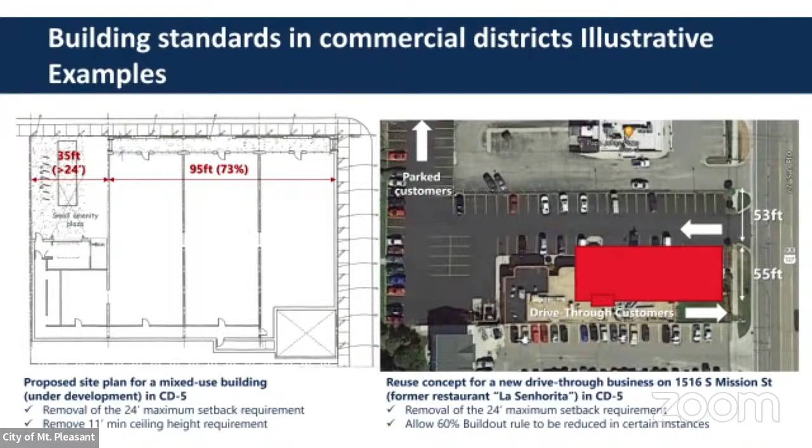On the right, you have a drive-through establishment that wanted to come into this site on Mission Street, and they did not want to rebuild the whole parking lot. This amendment would also allow reuse and retrofit of existing sites without adding too much cost onto development.

These two illustrations here on your left show a commercial building with a 24-foot height at frontage, but the actual roof pitch reaches that 24 feet and is hidden behind the wall around the building perimeter. That's the kind of accommodation that we'll be allowing moving forward.

And then with the removal of the 24-foot side setback, we would also be allowing things like outdoor recreation areas or open seating, like you see here in this illustration.

Parking would still only be allowed in the third lot layer, which is represented here in this illustration on the left. The illustration on the right shows a building that has the 24-foot maximum or minimum height at frontage, but then it goes down in the back, so that would be able to be accomplished.

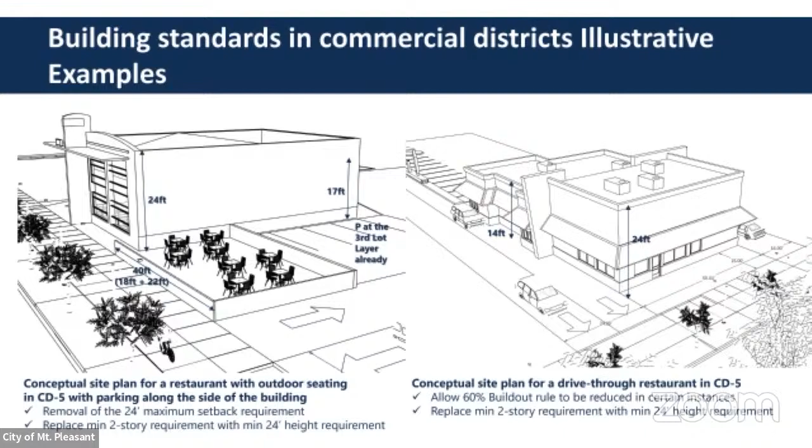And we also would allow a certain 60% build-out rule to be reduced. In this case, I'm showing a narrow site that needed that accommodation due to the drive-through configuration needing 2 exit lanes.

This is the last illustration showing a mixed-use development achieving its maximum height allowance in CD5 districts. This is an illustration on Mission Street. We would be allowing that 15-foot setback at the corner to provide enough clearance for vehicles to approach Mission. And then the principal frontage clarification would allow a 41% build-out scenario on the side street to accommodate for parking in the back, which is our overall goal with parking in these commercial areas.

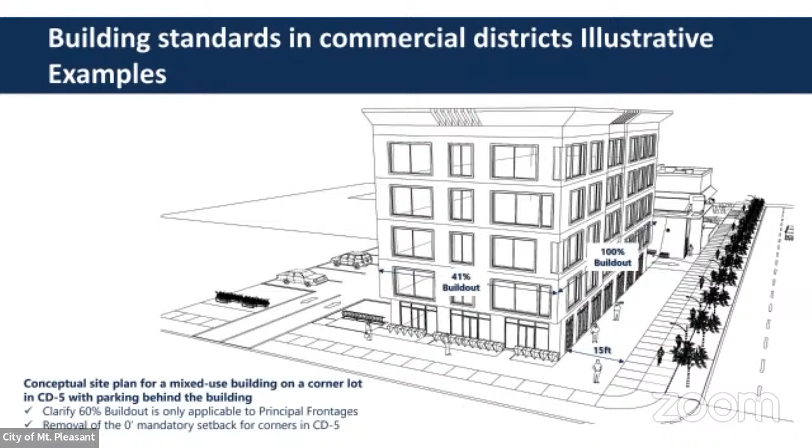So the requested action is for the Planning Commission to recommend that the City Commission adopts text change 24-01. That concludes my presentation. Thank you so much.

Thank you, Ms. Barber-Dykiel. Do any members of the Planning Commission have any questions?

A couple quick ones. Isn't the 11-foot requirement actually 14 feet? No, I double checked that, and remember we had that confusion last time. The current requirement is 11 feet. The 14-foot is the maximum ceiling requirement for first stories. Okay, I guess I don't know what happened with that one property, but they were insisting that the city was insisting on 14-foot ceilings. That may be a miscommunication. The requirement was 11 feet, and I do have a letter from the design team saying that they were accommodating the 11-foot ceiling from the frontage. Okay.

Any further questions? I'll open this up to public comment. Seeing nobody looking to speak, I'll close the public comment and open for discussion. Nothing online. Apparent lack of interest. Okay.

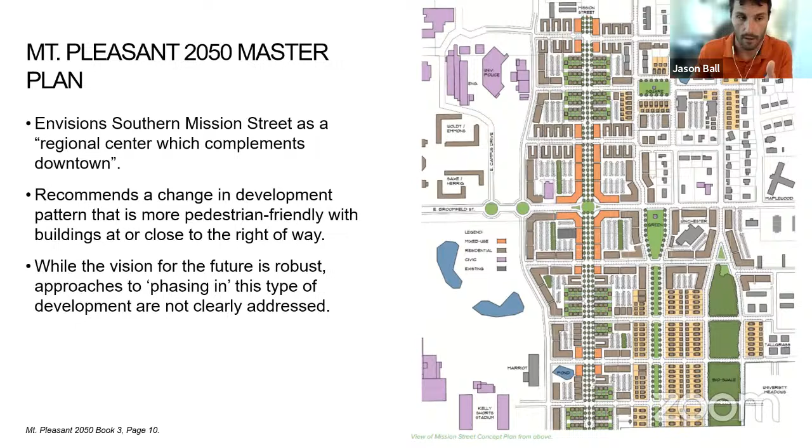We looked through a variety of other plans, including the city's complete streets policy, as well as previous access management plans. Any result from this work will be consistent with the city's adopted complete street policy.

This slide is taken from the city's 2008 corridor access management plan. One thing we wanted to show is that while we're doing new work, most of the concepts we'll be talking about are not new.

This shows the corner of Bluegrass or West Campus Drive and Mission Street - there's a gas station, Target, and the hotel there. Any of you who were on our walking audit, we walked this portion of the corridor.

This plan notes needs for cross access, closing driveways, and limiting access to the street to improve safety and reduce potential conflicts between pedestrians and vehicles making turns. These are all still really good ideas that need to happen - we're not throwing away this previous work, just building upon it and exploring how it works in today's context.

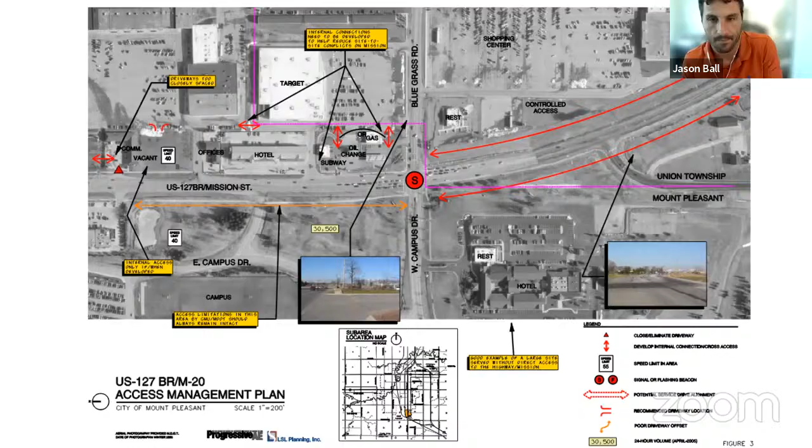The next piece of work we did was looking at demographic changes, particularly the impact of population change as it relates to decreases in enrollment at CMU.

While Mount Pleasant lost about 4,200 people over roughly that same period, CMU saw a decline of about 8,800 students at its main campus. Assuming many of those students are living in Mount Pleasant, we'd expect a similar decline in city population, but we haven't seen that same drop - 4,200 is a lot less than 8,800.

Looking at population change across age brackets in 5-year increments, between 2011 and 2022 there was a decline of about 4,000 people in the college age bracket - late teens, early 20s. But during that same period, there was an increase of about 1,000 people in the family formation age, 30 to 45, then a decline in people in their 50s and an uptick in people in retirement age, 65 to 75.

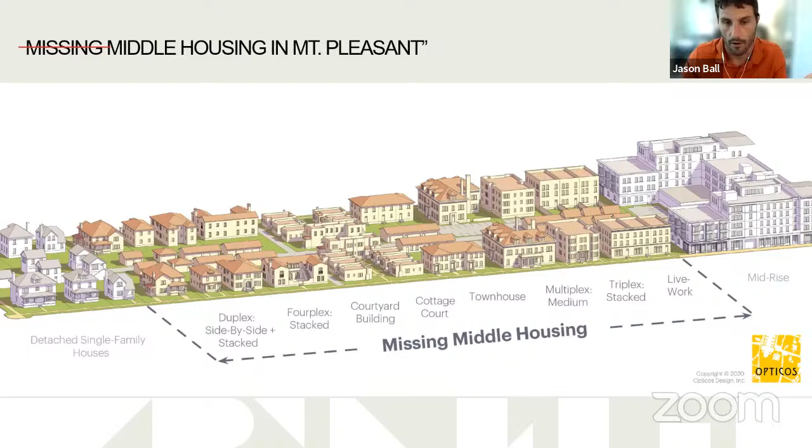Lastly, when we look at housing, you may be fairly familiar with this graphic — I believe it's in your master plan. We've had this concept for a long time in Michigan that we've been building a lot of the housing types on the far left and right-hand side of this graphic: lots of detached single-family homes, lots of large apartment buildings, but not much in between.

That's certainly true for Michigan, but it's not actually true for Mount Pleasant. This chart shows the distribution of housing types, not households, but physical housing types by the number of units in a structure. In the state of Michigan as a whole, a little over 70% of all housing units are single-family detached — one house, yard, driveway, et cetera. In Mount Pleasant, that number is 40%.

In that sort of missing middle category — structures with between 3 and 19 housing units — Mount Pleasant has a really nice share of housing units within those kinds of structures. This may present an opportunity for the city to think about, as you're seeing changes in student enrollment and changes in preference for your population, opportunities to repurpose some of those housing units to be less focused towards students and more focused towards the populations you're seeing come to the city — families as well as retirees.

Home values have generally stayed relatively steady compared to the city of Midland, the next closest large city to Mount Pleasant. The home value index dropped off a little bit over the last couple of years, but generally it's holding pretty consistent with Midland, which has a very healthy housing market, as healthy as any housing market is right now.

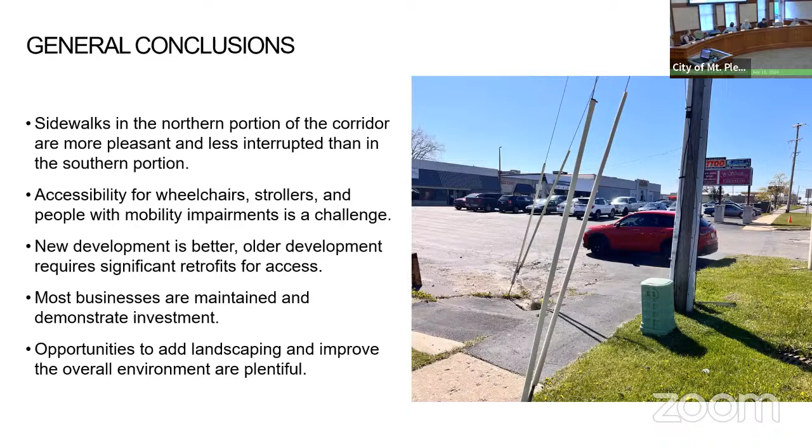The picture here is in our southern part of the corridor. You can see the sidewalk just kind of ends in a parking lot with a car parked in front of it. Accessibility is a challenge for anybody that's not walking, or even folks that are walking, whether you're in a wheelchair or a stroller. Anybody with mobility challenges finds it difficult.

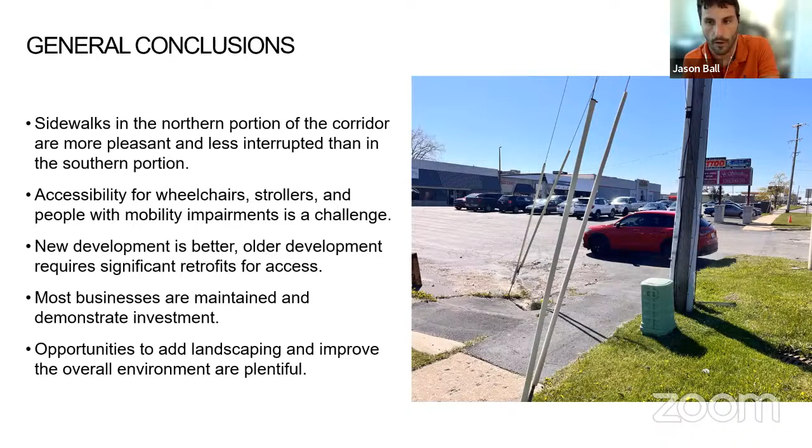Generally, new developments that have come in over the last 5 to 10 years do a much better job of providing pedestrian access to the street and limiting driveway access than older legacy developments, where that wasn't a priority. That being said, most businesses are well maintained and demonstrate investment, with relatively low vacancy rates still. There are lots of opportunities to add landscaping and pursue basic aesthetic improvements in relatively low cost, tactical ways that we'll be exploring.

This illustrates our existing right-of-way. This varies, so this is a generalized version, but we actually have 4 different right-of-way widths throughout the corridor. Generally, from Bluegrass to Preston we're 100 feet plus, and between Preston and Pickard we're between 80 feet and 70 feet in terms of available right-of-way.

From Bluegrass to Preston, when you get outside of the sidewalk, generally we don't have buildings close to the street. Everything's set way back, with parking lots or landscaping and grass between the sidewalk and destinations. Whereas in the northern portion of the corridor, north of Preston, we've got buildings much closer to the street—maybe not at the sidewalk, but within relatively easy walking distance.

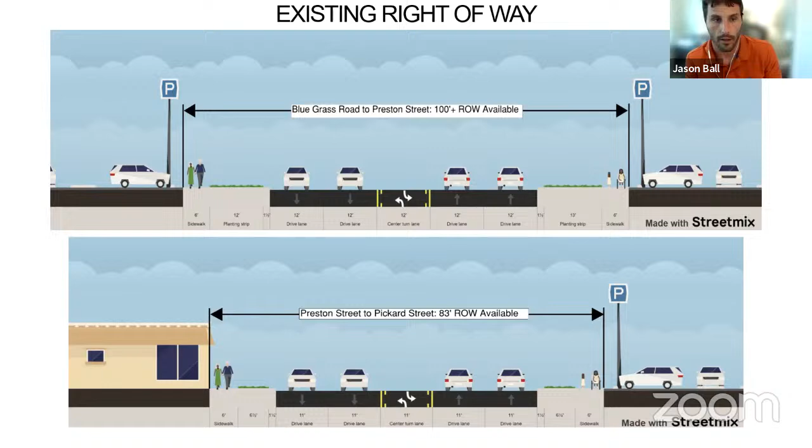Volumes also vary along the corridor, with higher volumes south of High Street and lower volumes as you go further north.

This slide shows the locations of traffic accidents or crashes along the corridor. As you can see, crash frequency is highest at the southern end of the corridor, concentrated at the intersection at Broomfield. Generally, severe crashes were located at that intersection, including a fatal crash with a pedestrian earlier this year, and also closer to Broadway. Overall, in the 5-year period we studied, from 2018 to 2022, there were over 1,000 crashes in our 3-mile corridor.

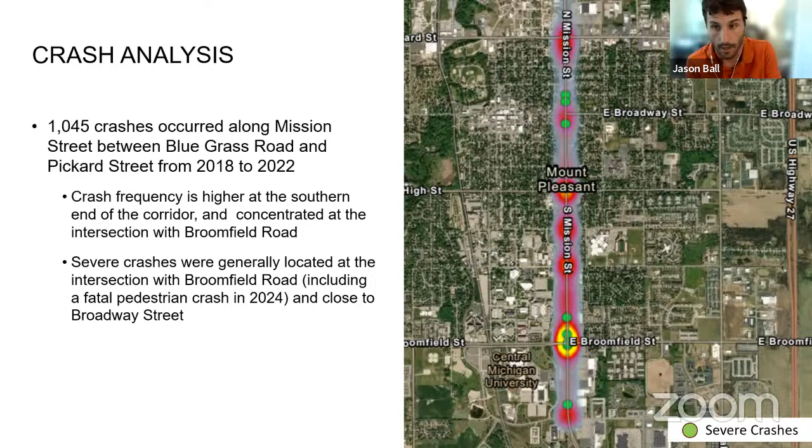As we think about designing the corridor, it's important that we pay extra attention to crashes or impacts on what we call vulnerable road users—essentially anyone who doesn't have the protection of a car around them. While pedestrians and bicyclists were involved in just 2% of crashes, they were part of 33% of the crashes that resulted in a severe injury. This is common sense: if you're in a crash with a car while on a bike or walking, the chances you get hurt go way up compared to being in a car with airbags and modern safety improvements.

So as we think about designing the corridor and addressing that safety issue, we're really going to be thinking about not just how we provide for vehicles, but also how we ensure we're protecting those vulnerable road users to make the corridor safer and reduce those serious injury crashes.

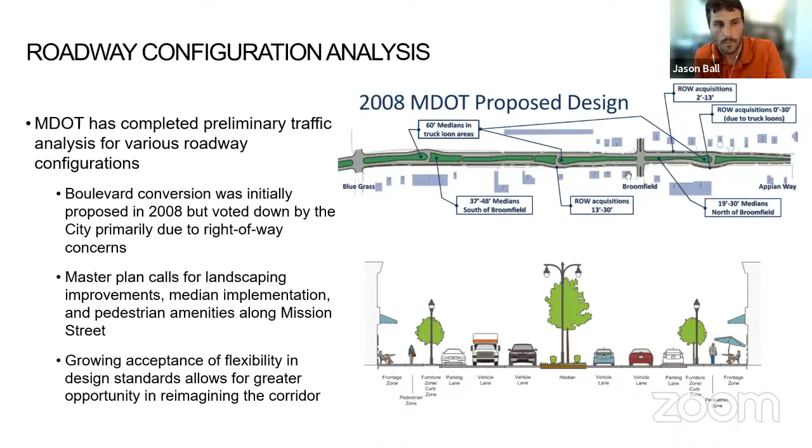MDOT earlier this year performed some modeling to understand the change in vehicle operations based on different roadway configurations. They looked at impacts of adding a median like the one shown in the picture above, based on a scenario with gradual increases in traffic volumes over time. You can see that by adding the median or boulevard concept, overall vehicle delay in the corridor is much less than with the current condition, and congestion goes down—so efficiency is better. You're able to travel from one end of the corridor to the other in less time than if we maintained the current condition.

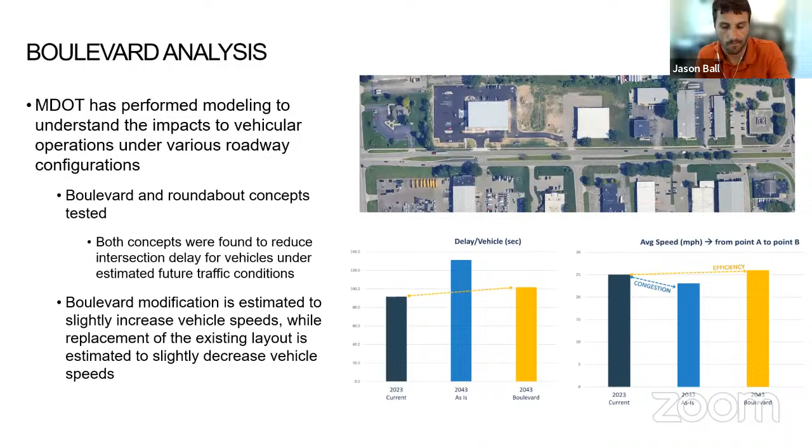Lastly, our summary of survey results. We had a spectacular response with almost 1,500 total responses. About 70% of those are Mount Pleasant residents, 16% were visitors to Mission Street, 14% identified as students at Central Michigan, and the remainder were employees of businesses on Mission Street. Not surprisingly, almost all responses, 98%, use a car today to get around Mission Street. About 20% also walk, and about 10% also bicycle or scooter. But almost everybody uses a car as their primary means of transportation, or at least some of the time.

When we asked people what mode of transportation they'd like to use, only about 60% said they prefer to only use their car. So a significant percentage of those 1,500 respondents would like to have other options, essentially split between walking, biking, and with a little less interest but still some interest, opportunities for public transit. Certainly everybody uses a car today because that's the safest and best way to access the corridor, but there's pretty significant interest in other options for transportation.

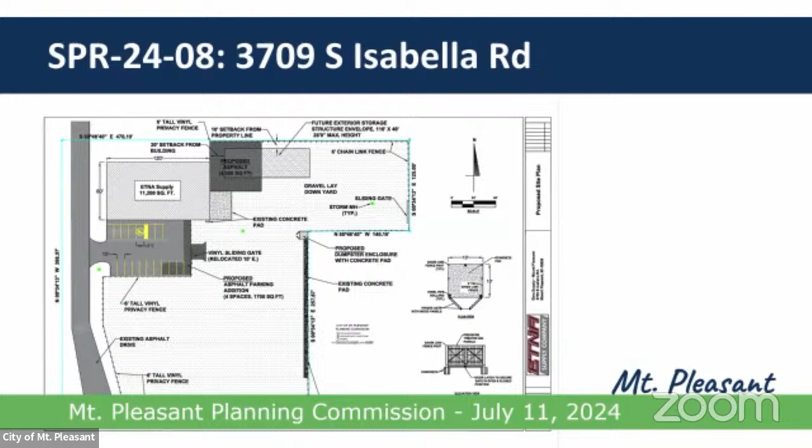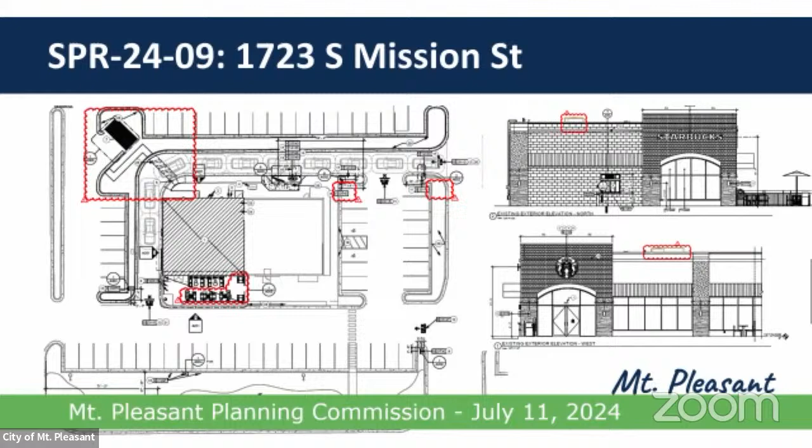Staff also approved 1723 South Mission. This is a proposal for using an existing space for a Starbucks. They're going to use the existing drive-through configuration and are still able to accommodate 10 cars as required by the zoning ordinance. They provided a new dumpster on site - currently the mall shares a large dumpster on the south end, but they decided to create a new space for their use in the top left corner, highlighted in red. They're also doing some small changes to facade materials, signage, windows, and fence.

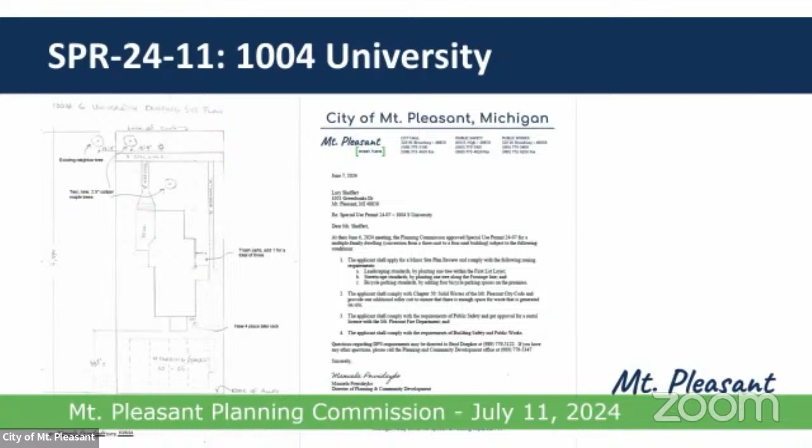The last project is a follow-up from our previous meeting in June, which had a special use permit for 1004 South University. They are converting the 3-unit building into a 4-unit building, and one condition was that they applied for a site plan to add new trees on the premises per the zoning ordinance, and an additional roller cart to make sure waste isn't spilled out of the current capacity. So those are the 3 projects - if you have any questions, let me know.

Any questions? Okay, thank you.

At this time there's no further business, and I would entertain a motion to adjourn. Move to adjourn. Second. All those in favor? Aye. Motion passes.